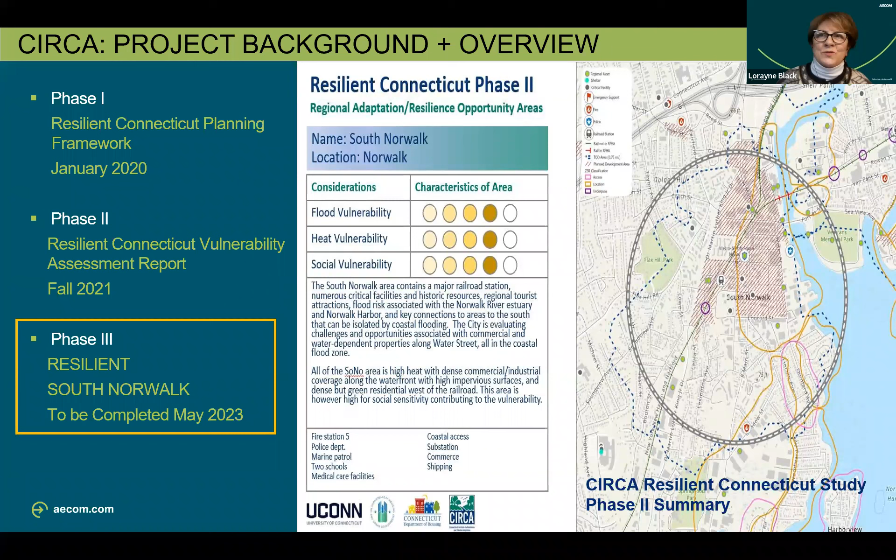And that's where we are right now. It's focused on 7 selected municipalities for pilot studies that will look at specific implementable concept plans. And South Norwalk is one of those selected communities. Next slide.

So phase 3, which, as I said, we're in the middle of, we're going to focus on heat, flood, and social vulnerabilities. The study area has large sections of impervious pavement and reduced tree canopy. It's adjacent to the shorelines of Norwalk Harbor and Long Island Sound, with the effects of higher tides and other storm-related flooding. It's within an area that the city is focused on for affordable housing. And it's also in proximity to the train station and some of the city's transit-oriented development housing projects. Next slide.

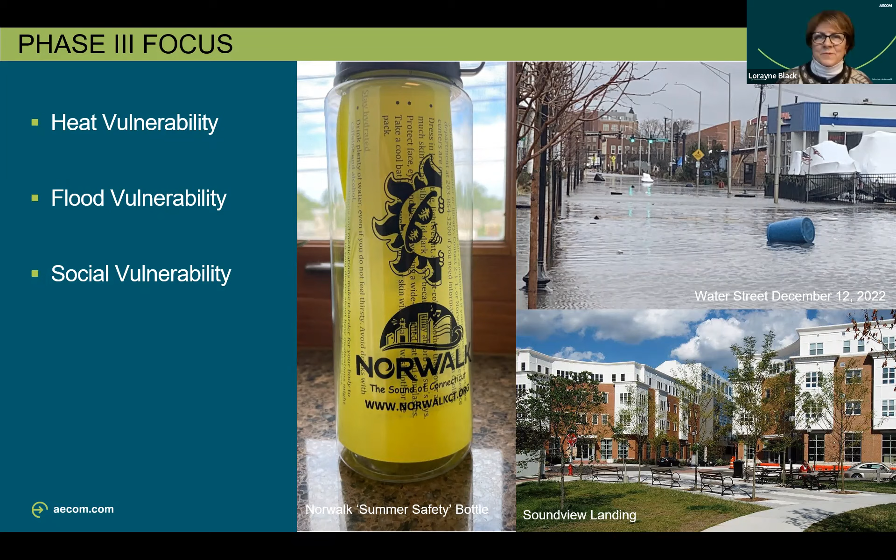So let's get into the study. Our study area is centered within diverse and vibrant neighborhoods of South Norwalk, bordered to the north by Day and Water streets, moving forward to the south to Meadow Street, which is to the west, and then further south down along Woodward Avenue.

to Longshore Drive. And the goals for the project were really threefold: to develop innovative ideas and strategies to reduce and lessen impacts of climate change, and to do that focused on heat and flood impacts within the study area in South Norwalk. And for the third, really, is to determine stakeholder and community member priorities, and that's why we're here tonight. In order to study the area in closer detail, just to understand this graphic that you're looking at, we've subdivided the project area, and you'll see this throughout the presentation.

We subdivided it into three study zones. We have the North Study Zone, which has distinct characteristics and climate impacts. The North Study Zone is comprised of the marina and industrial waterfront development along the harbor.

It also has multifamily housing and apartments within this area, such as the Soundview Landing and Harborside SoNo apartments. The Central Study Zone is a mix of single-family residential areas as well as industrial offices, particularly the residential areas between Meadow Street and Woodward, so very different land uses.

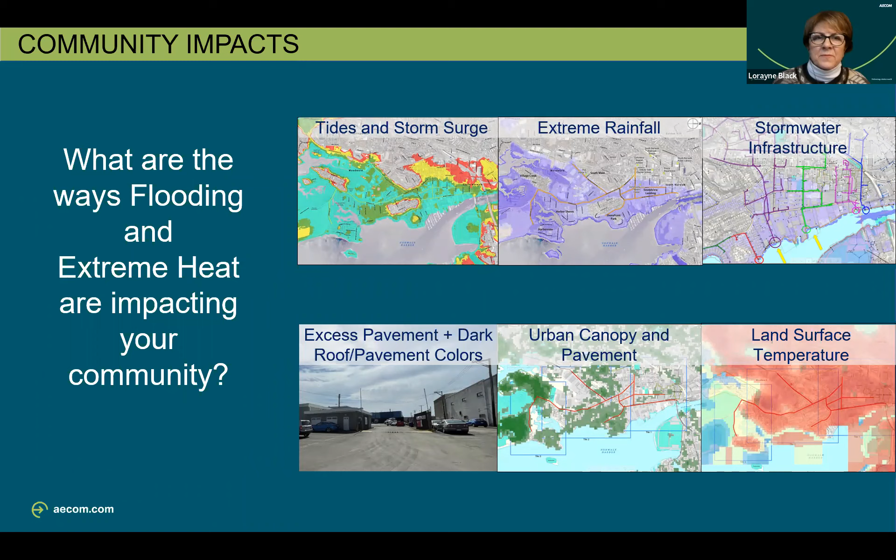So we're going to talk about heat. We've all felt the changes in the number of hotter and more humid days, especially last summer. When we look towards 2050, the average temperature is predicted to rise 5 degrees, and the number of days over 77 degrees is predicted to rise from about 81 now to 118.

We're going to prepare for hotter days, hotter nights, and more heat waves. So some questions to consider as we move through here: are you experiencing health impacts surrounding the change in temperature? Are there obstacles to getting to cooling centers? And have you gone to one in the past, or would you consider going to one in the future?

Do you think there are enough trees that create shade along sidewalks and around parking lots in your neighborhood? Are there large areas of pavement near you, and are they surrounded by buildings that might block some breezes from the waterfront? Are the roofs and pavement surfaces around you a darker color that might absorb heat?

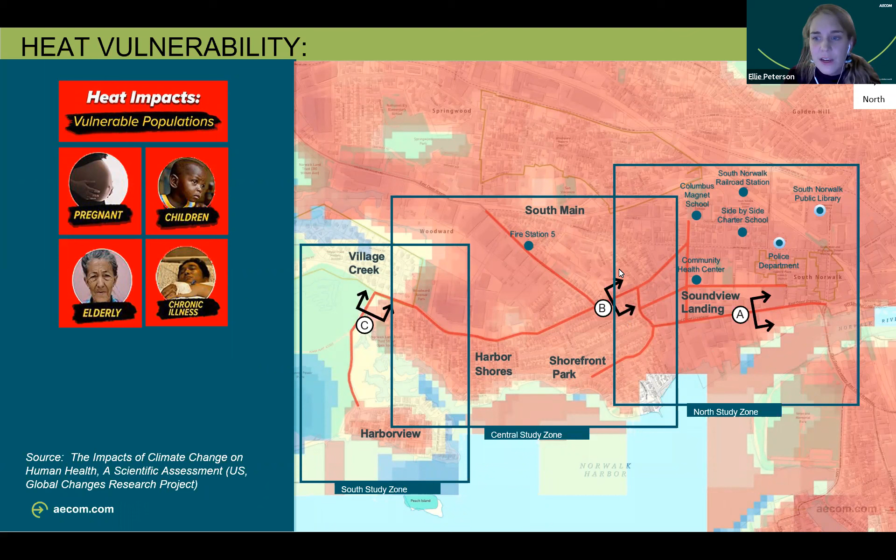So with that in mind, moving back over to the map, in this study we thought it would be helpful to zoom into areas within each of our study zones to determine how varying types of land use throughout the city can affect increased heat vulnerability, while also keeping these communities in the forefront as we discuss some of these key issues.

For the first example, we have a slice of Upper Water Street, which shows the conditions of a multifamily residential unit on one side, and the semi-industrial zone along the marina on the other side. In this location, temperatures were recorded at about 7 degrees over average, which is considered high.

There are a number of factors that can elevate heat in this scenario. For one, reduced tree canopy or other shade structures creates more opportunities for heat to reach the land surface. Large buildings can contribute because they often absorb heat and block wind from circulating. And as shown on the marina side, darker surfaces such as large areas of impervious paving absorb heat.

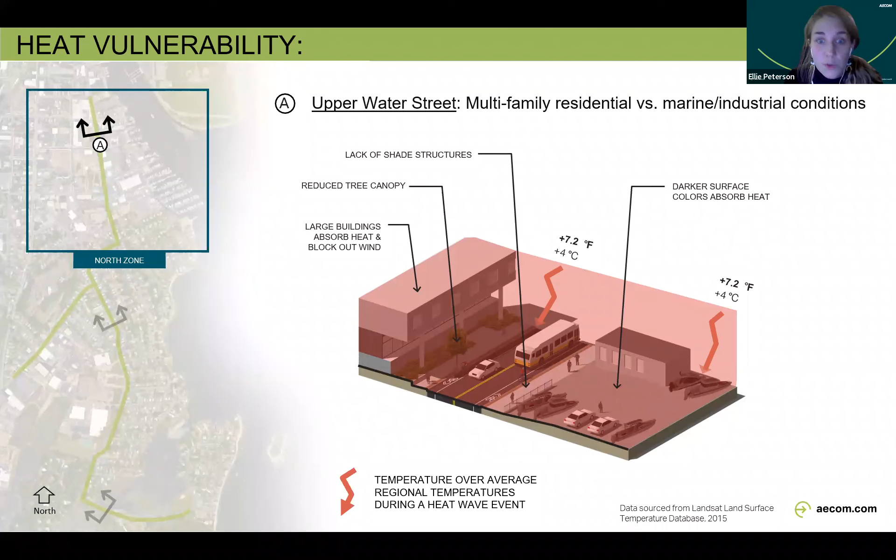Next, in the central zone, we chose the example of a residential neighborhood on Woodward Ave. This area also experienced temperatures of about 7 degrees over average, and although more areas were planted overall, there is still limited canopy along the road.

Another factor to consider in residential areas in general is how increased atmospheric pollution and waste heat via HVAC systems contributes to rising temperatures as well. Interestingly, ACs actually influence air temperature more significantly at night, so people without them are even less likely to experience the relief they would ordinarily get at night.

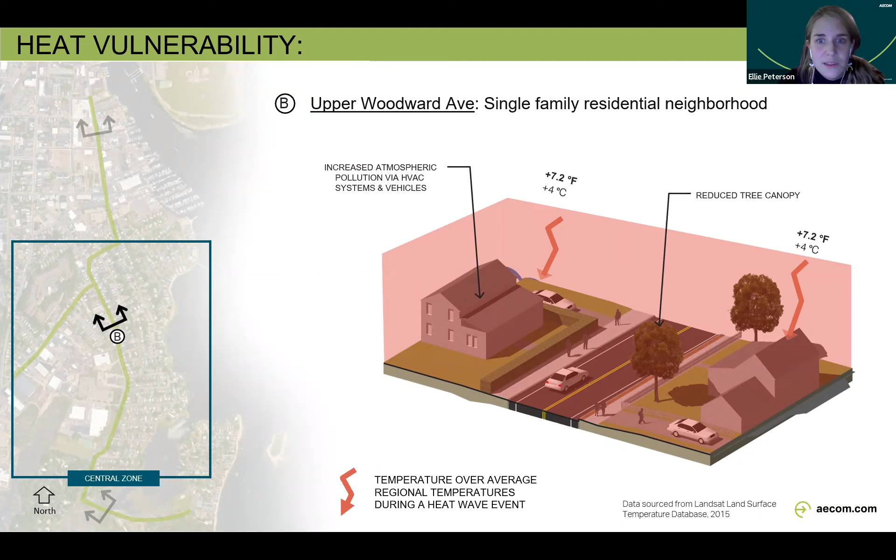And there's an awful irony in all of this, because as temperatures rise and hot days become more common, people will rely on home cooling systems even more frequently.

Then lastly, in the South study zone, we looked at a strip on Longshore Drive that passes through protected open space and coastal wetlands. This zone was heating at a much lesser rate despite its proximity to urban areas, due to it being a far more resilient area with increased green space and tree canopy. Also, wetlands reflect heat and therefore warm at a much slower rate.

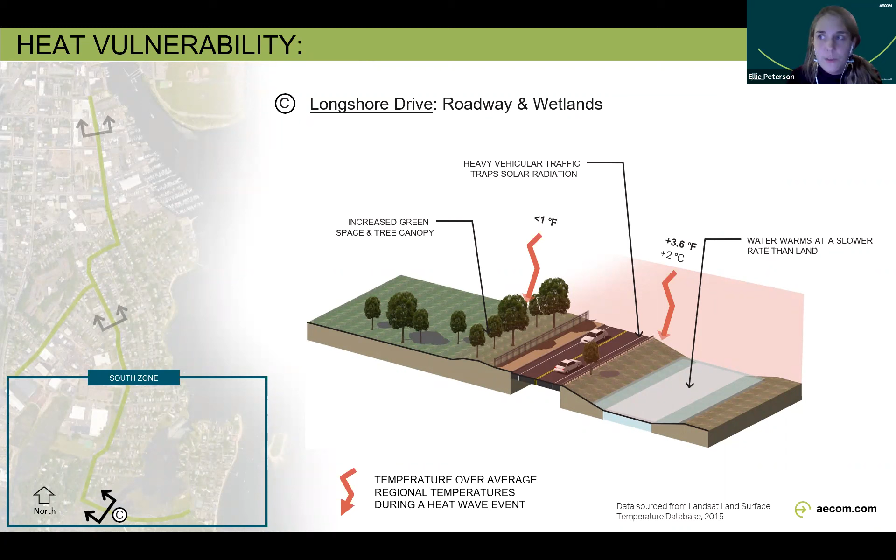So with some of these examples in mind, we thought we would move into our first discussion period to end and open up to questions.

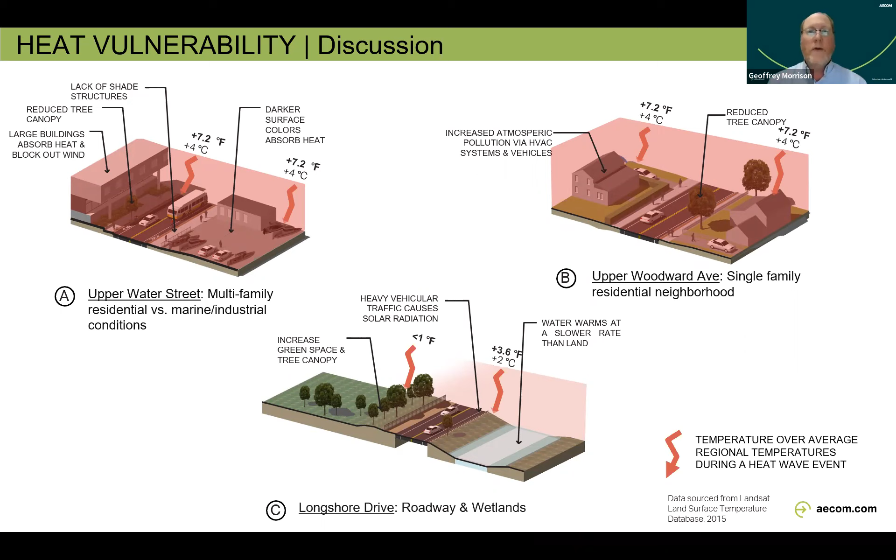Great, yeah, I think it's one of those things we can look at too. Part of it might be standards that the city has in terms of development standards. So when you come in to do a project and a proposal, clearly there's a need to get your site ready, but are there certain standards that can be put in place about replacing some of the tree canopy, or thinking about it a little more critically than what's happening right now?

So, good question, good comment. Well, and the city may already be doing this as far as assessing the trees themselves, what's the age of them. Once they get older, they are under stress and may suffer from some breakage, and then coming back through and planting new ones.

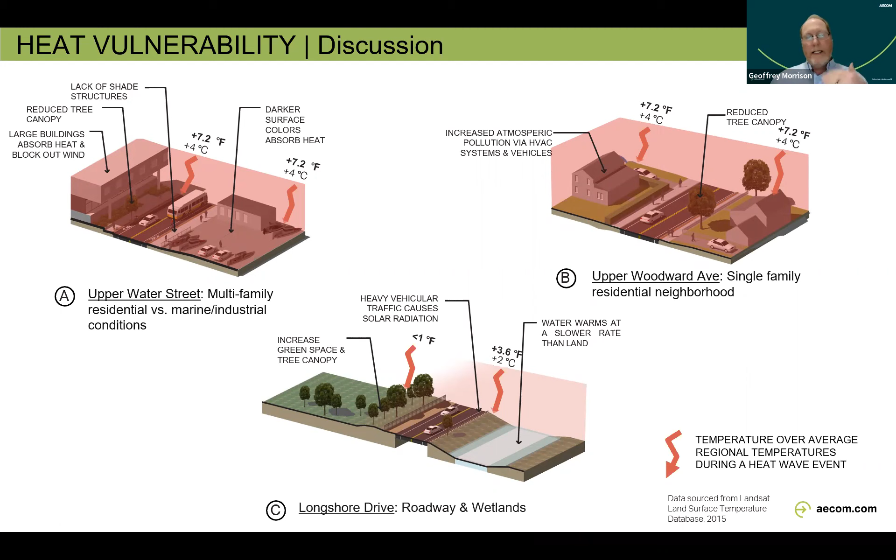Great, so Lorayne, I'd suggest let's move forward. So thank you for this. This is the first one of 3 more to go here. But again, the focus on this one was heat vulnerability. We really appreciate that. So if you want to keep the questions going, feel free at any point to add to the Q&A, and we'll come back to those as well.

But let's go on to the next part, onto flood risk. So now we're going to talk about the flood risk. Next slide, please. We looked at the existing and future conditions for flooding vulnerability within the project area.

As some of us have probably heard, sea level rise in Connecticut is predicted to rise 20 inches by mid-century, 2050, and to continue to increase even after that point. One thing to think about is that small changes in mean sea level have a big impact on the frequency of flooding. So currently, we think of flooding in minor, moderate, and major flooding thresholds, but they'll occur more often: minor flooding will become the mean higher high water, moderate flooding will occur more frequently, more annually, and major flooding will occur probably every 2 to 3 years in 2050. So definitely frequency is an issue.

And when we were looking at this, we divided it into generally 3 sources of flood conditions. Each of them contributes to the accumulation of surface water within the project area. So we can expect the source of flooding to be from storm surge, higher tides from the Norwalk Harbor and Long Island Sound, increase in precipitation amounts, and again, as I mentioned, frequency of storms, or possibly inadequate capacity flow in the drainage system. Probably more likely, it's really a combination of all these factors that contributes to current and future flooding. Next slide, please.

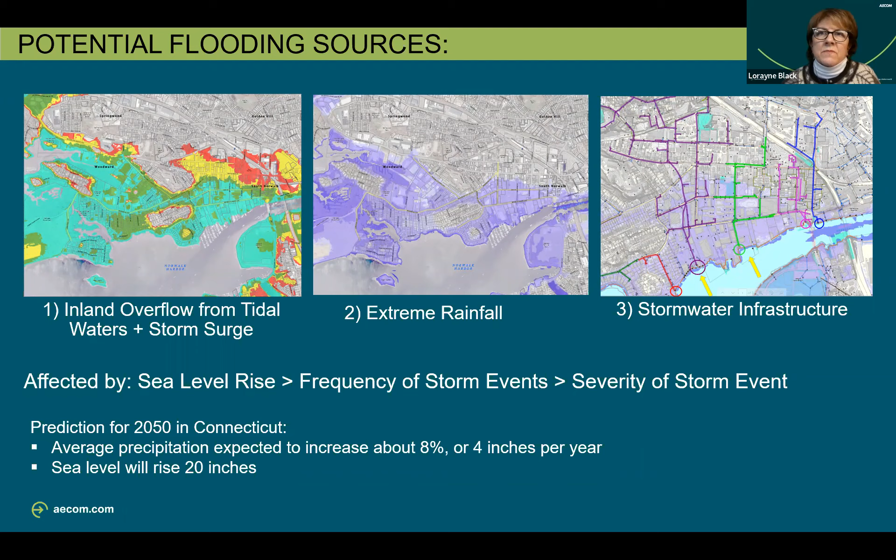So we've shown all of our flood limits based on 100-year flood maps as modeled by CIRCA. When you hear about the range of flood events referred to as like 25-year flood, 50, 100, 500, just as a moment of definition, it's really in terms of level of risk, not terms of years. So a 100-year flood describes the statistical likelihood of an area being flooded within any given year—it's like a 1% chance, or 1 out of 100 chance, of flood for any given year.

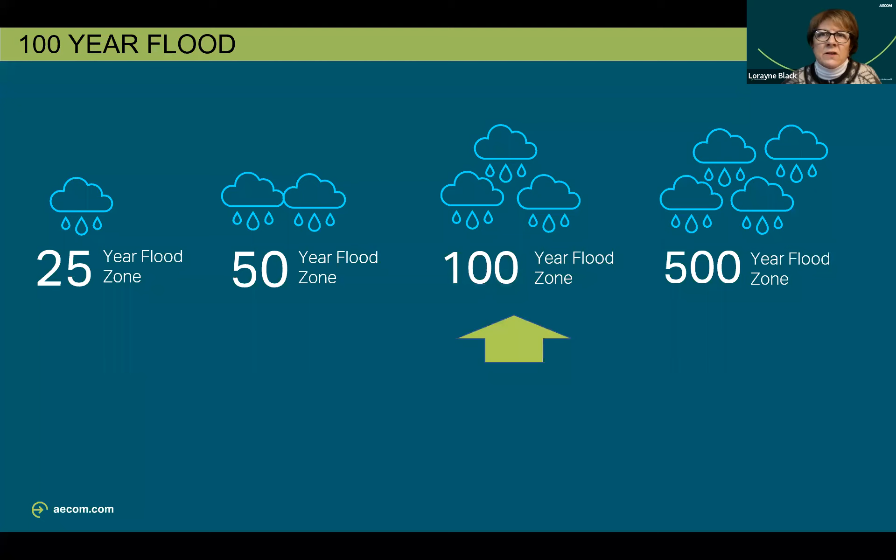And I'm going to pass this now on to Megan Gibbons, and she's going to walk us through discussing storm surge and also the stormwater infrastructure for our study area. So Megan. Thanks, Lorayne. You can flip to the next slide.

So storm surge is the abnormal rise in seawater level during a storm. What I have here is a very zoomed out picture of the location of South Norwalk within the Long Island Sound and further out the Atlantic Ocean.

Typical air patterns in a hurricane travel counterclockwise, and the hurricane is shown by that white circular twisty thing there. Storms traveling inland have wind patterns pushing counterclockwise, and the effects of each storm vary on strength and landfall. But if a storm is in the location shown, water is getting pushed from the Atlantic Ocean into the Long Island Sound, where it ends up getting trapped, and the water will pile up within that Long Island Sound by South Norwalk and move onto what is normally dry ground.

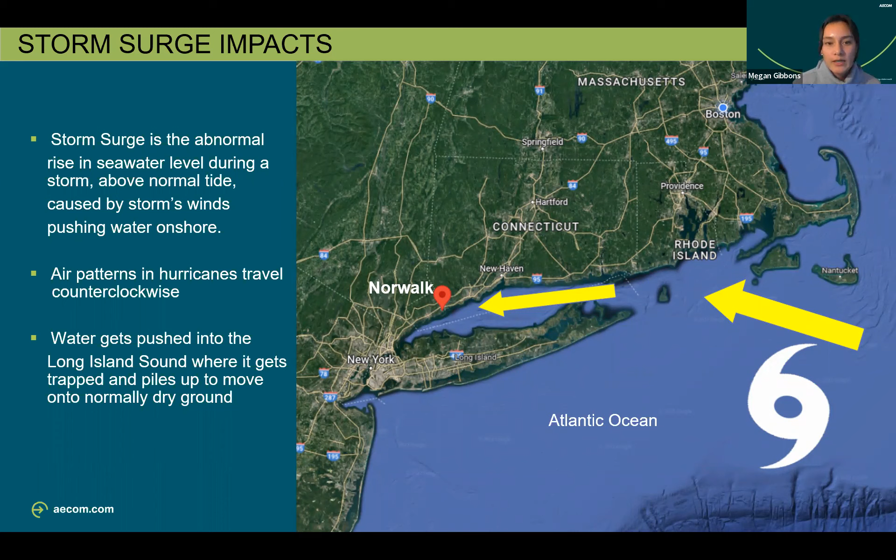So we're going to look at potential patterns of storms along the coastline of South Norwalk and how it affects the flooding there.

So here is a hurricane surge inundation map, and it shows the hurricane storm surge and each storm's potential flooding. The severity of potential flooding is dependent on each individual storm, so no two storms are the same, but you can see how the more severe storms flood further inland. For example, a Category 3 storm, shown by that yellow bar, the flooding area also includes the green and teal colors as well.

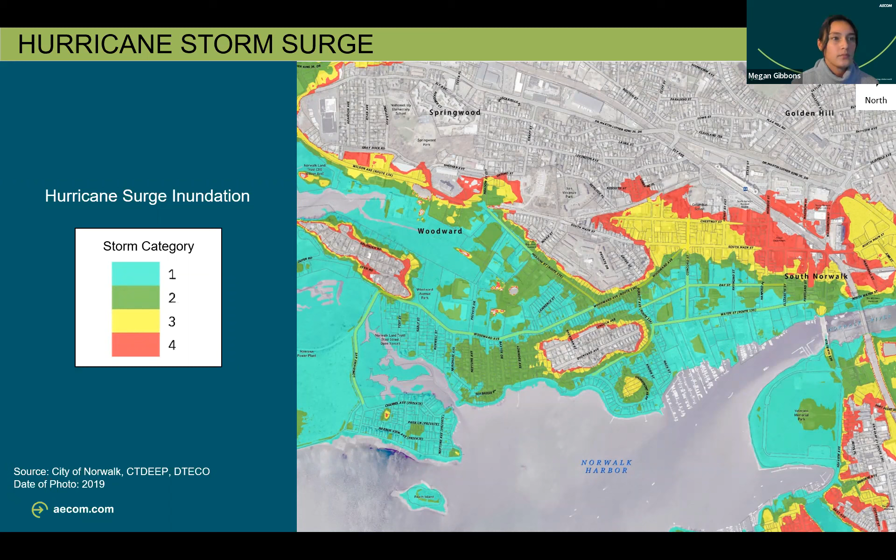This is a continuation of the same map, the Central Study Zone. Here, the neighborhoods of Shorefront Park, Harbor Shores, and Harborview are potentially affected from storm surge events. The surge is also able to extend from the Long Island Sound up through Village Creek and flood from that direction as well.

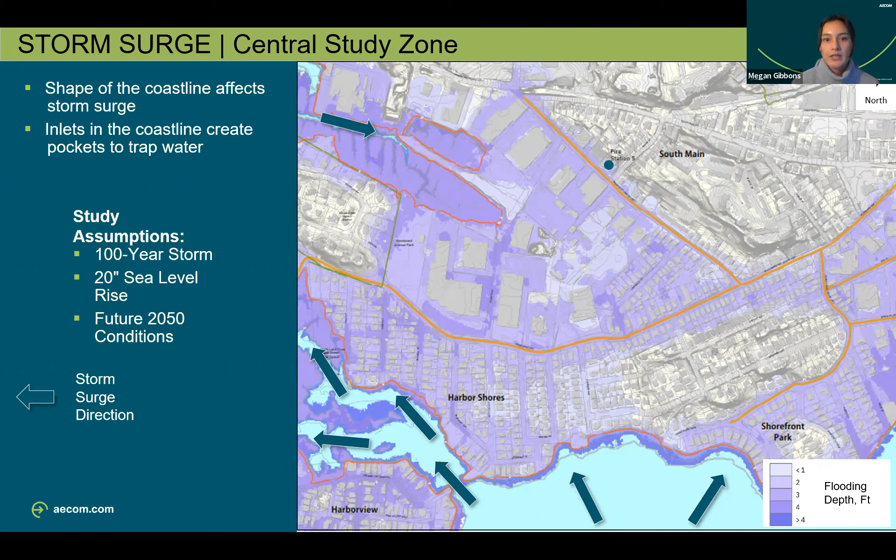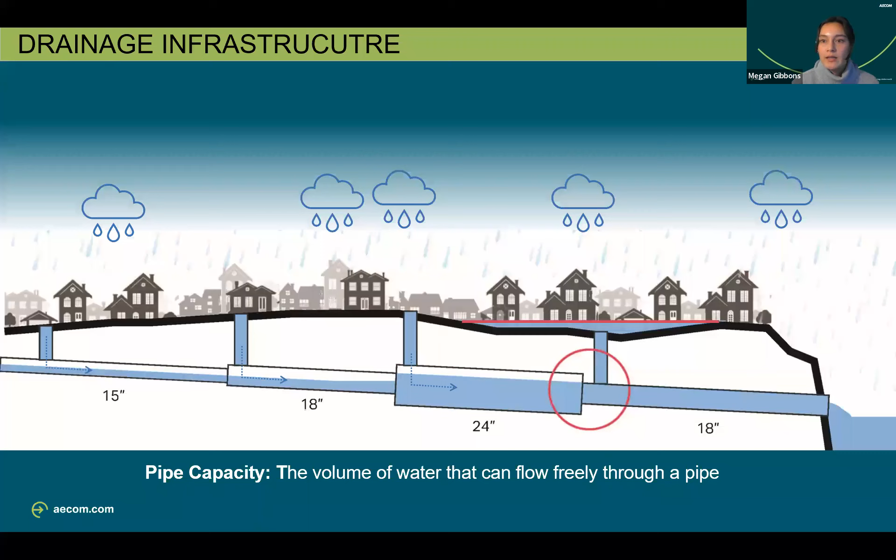We kind of want to think about it the same way as you would think about traffic. Imagine if you're on a 3-lane highway and you now have to merge onto a single ramp. Because the traffic is now merging into a smaller lane, it gets backed up, similarly to how the water would get backed up. It causes the water to get pushed further back into the drainage system, or in the highway analogy, and it will pool up and flood in your neighborhood because water is not able to move freely through the pipes. It's problems like this that we're going to be looking for in the existing drainage system throughout South Norwalk, and we will talk more on that and solutions for it in future meetings.

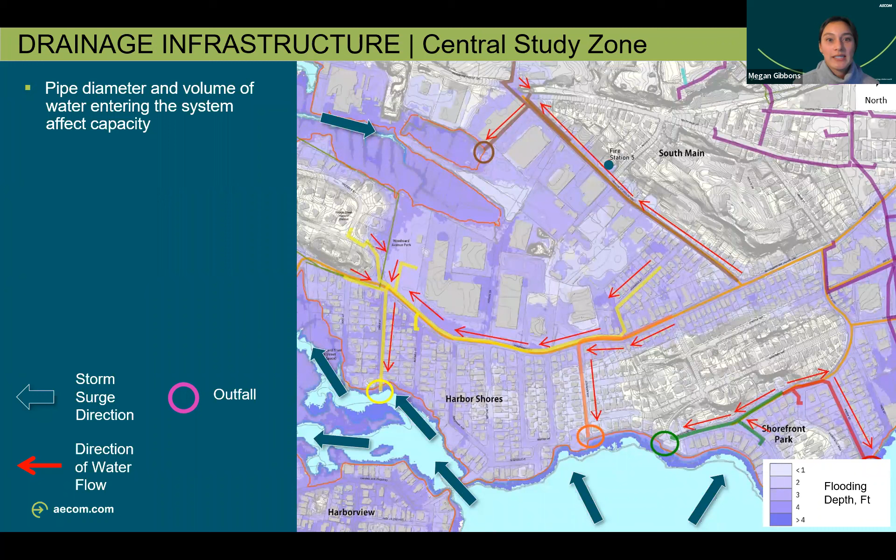We can move on to the next slide. So this is the central study zone. You can see a little bit of the purple network, and you can kind of see how our maps are flowing together here. This is just a map showing the combination of the drainage networks and the storm surge.

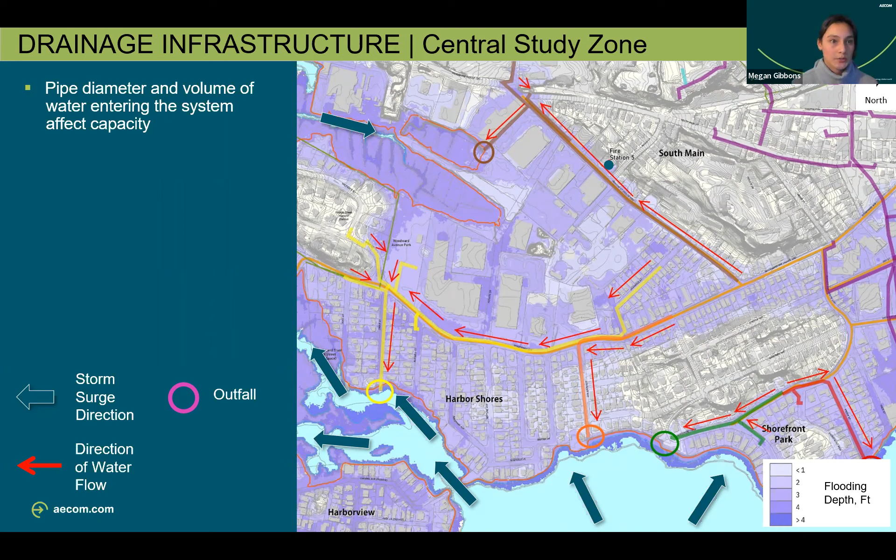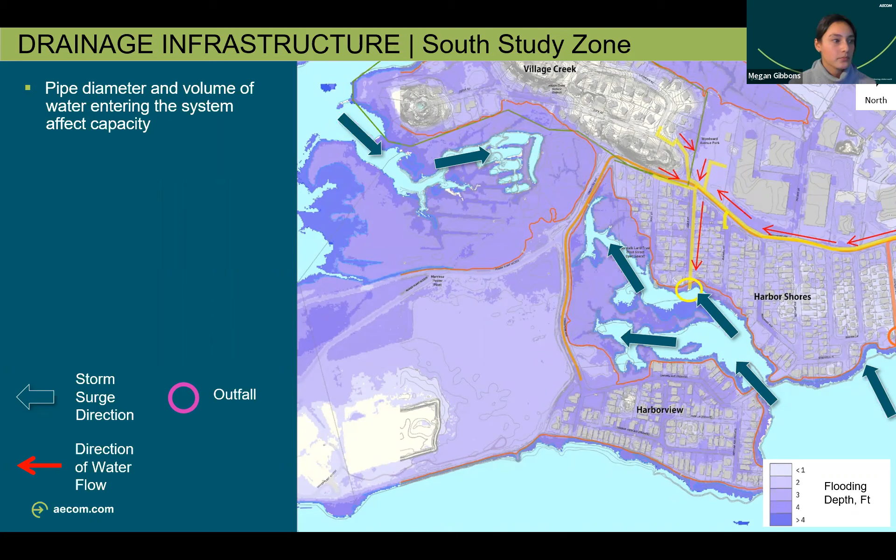And this map is the South Study Zone, same thing that we have been viewing. We're looking at the storm surge in combination with potential drainage infrastructure issues. So now I'll turn it back over to Lorayne.

Thanks, Megan, that was great. So now we've talked about storm surge and we've looked at drainage infrastructure, and we're going to move on to the 100-year flood, flooding from rainfall and storm events.

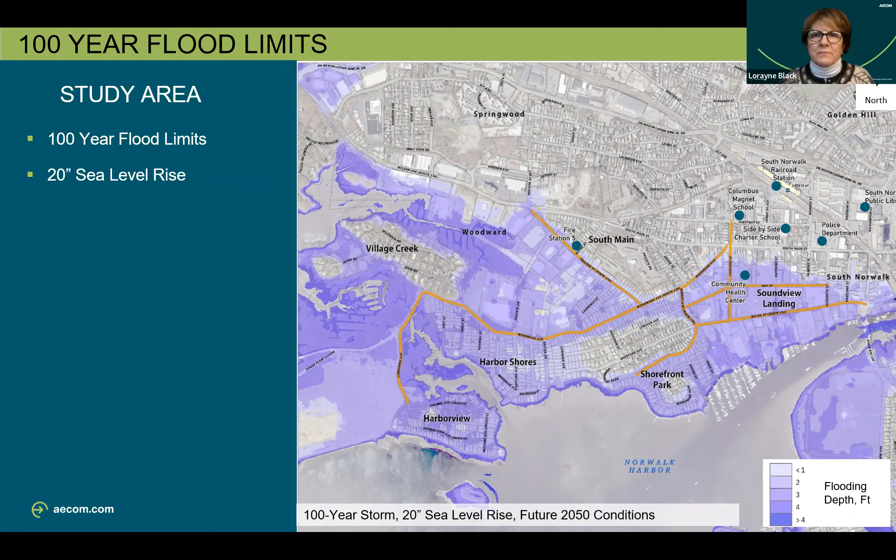Next slide, please. As we started looking at the existing and the future conditions that would potentially impact the zones, we've decided to select a series of representative locations within each of our subzones, so we'd really take a closer look and compare current flood limits with the future. The locations represent the different land use conditions to assess various scenarios, so that when we look at the next stage and look at mitigation and some concepts, we have good examples of varied land uses.

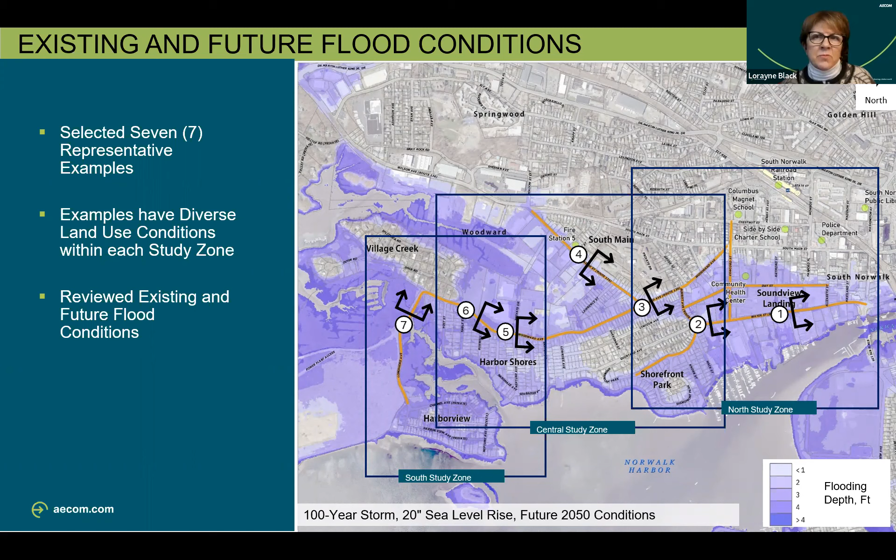These locations are identified, as you can see. There are 7 of them, and they're all numbered. We've looked at that in more detail. Next slide, please.

So looking at the North Zone, next slide. As we did for the heat section, we subdivided the project into 3 zones, starting with the North Study Zone at the north end with Day Street and Water Street. We have 2 locations that we've selected for the North area. These 2 locations are representative of the neighborhood because they include the waterfront along the marina and the industrial land uses. This area is also currently being reviewed through the recently completed Norwalk Industrial Waterfront Land Use Plan.

Across the street, number 1 is the Soundview Landing Development. This site has a number of site design elements, it's so new that it really addresses resiliency, so I thought that would be a good example of a location to look into. Number 2 is further south on Water Street. On the west side, it's an office building with a parking lot, and on the other side of the street is a city-owned property building, the 2nd taxing district. I think it might be a DPW building.

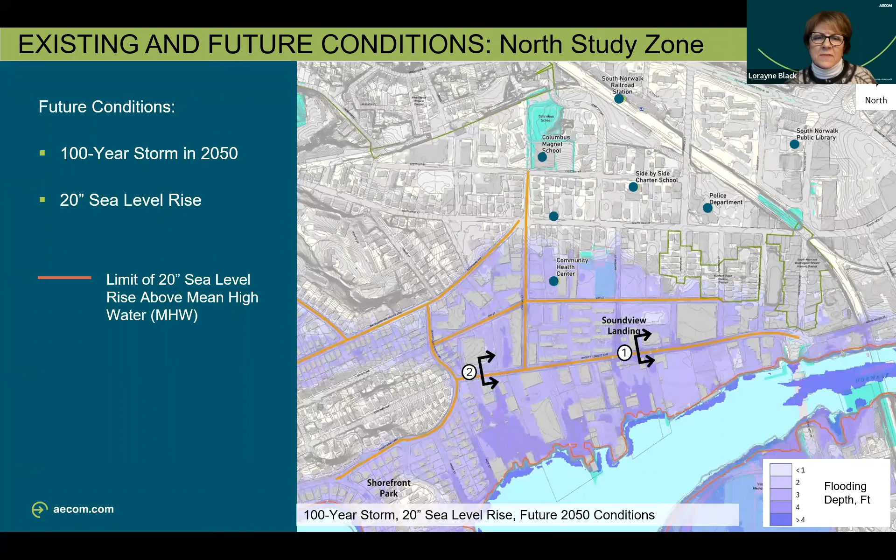So we're going to move on. Ellie Peterson is going to talk in a little more detail about these next illustrative graphics that show a no flood condition and the change with a 100-year flood in 2050 with sea level rise.

Thanks, Lorayne. A little disclaimer, I'm hoping to move through these graphics fairly quickly so we can have enough time to discuss them with everyone. We have a lot of visuals to show, and they're really here to help us brainstorm some ideas and observations and get the conversation started.

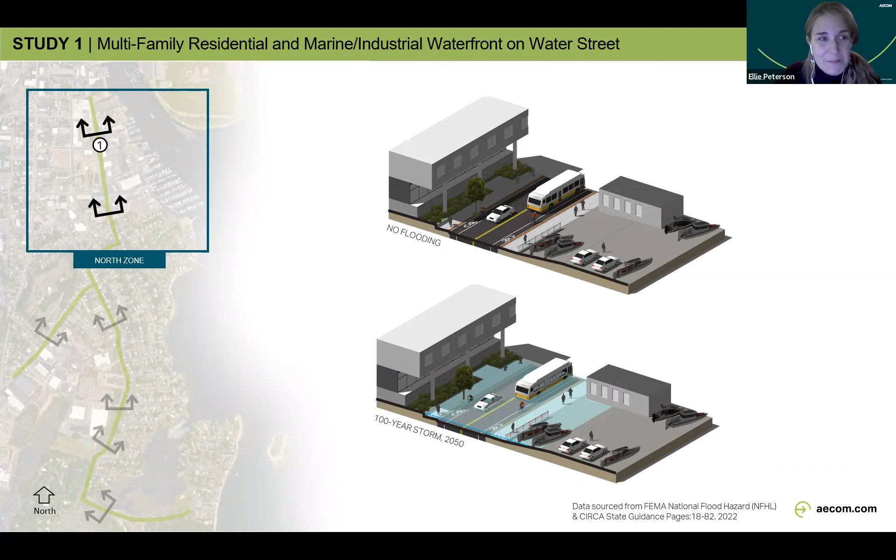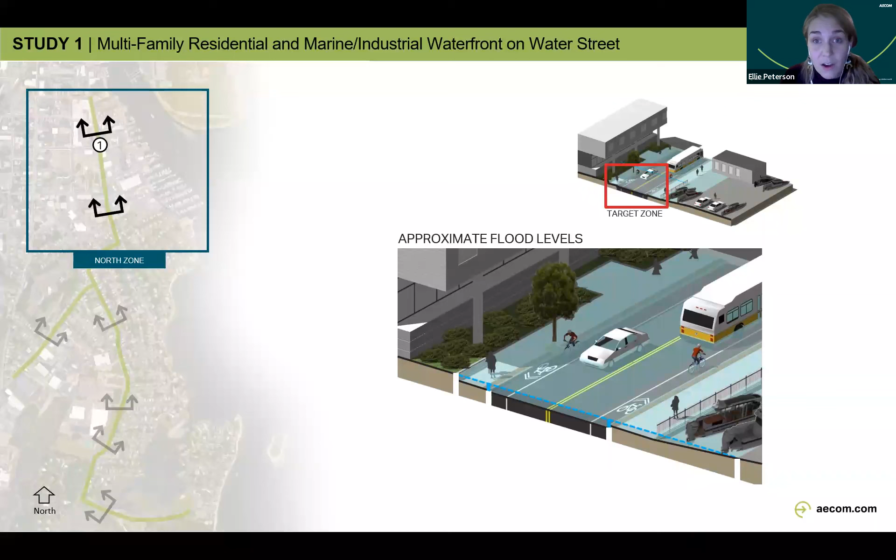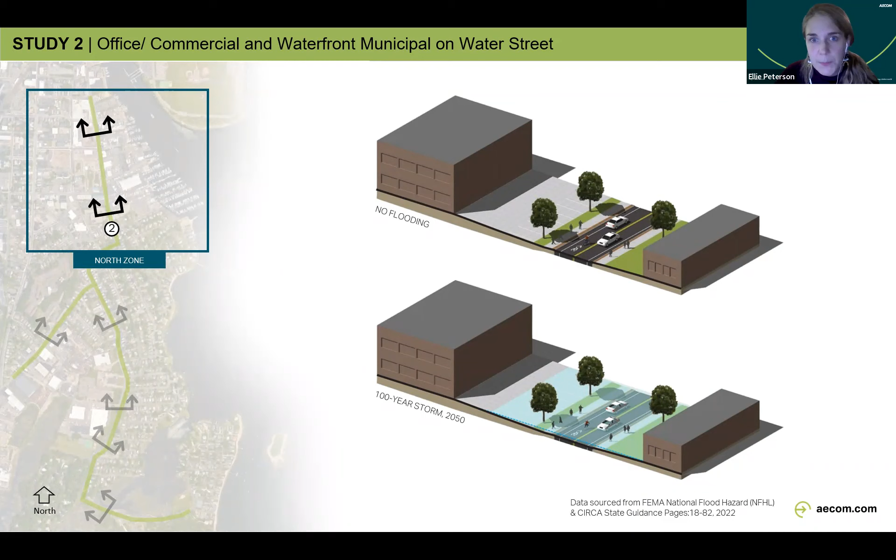And so again, flooding continues to impact Water Street most heavily, and circulation challenges could continue to be a consideration here. Clearly, local businesses would be affected as well, so we might consider how limited parking or access might affect those populations.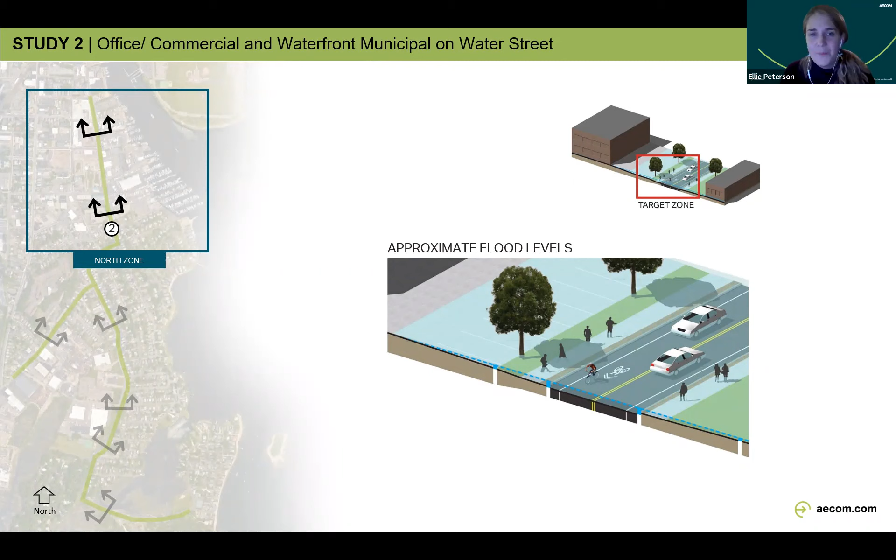Additionally, we may have more flexibility with land use shifts in this particular location due to it being public property. So we may consider more localized flooding mitigation, such as pervious paving or expansion of planted sections to include bioretention beds, for example. Now you can move on to the next slide, where we'll open it up to our second slot for discussion on flooding.

Well, thank you for that, Ellie. Really appreciate it. So here, as Ellie mentioned, we wanted to use these two case study locations to talk about some of the dynamics of flooding when we look out to 2050 and some of the different elements of your street that are impacted.

It's interesting, we'd love to hear comments from folks about understanding the North Zone. What is it like to walk down these streets during a flood event? One of the original slides Lorayne shared showed what it looks like when it's flooding, impacting sidewalks, the roads, the cars, the marine industrial area on the waterfront, and what folks need to do during an event.

So we'd love to confirm what's happening and make sure we're getting these graphics right, and hear about local issues so that when we come back at our next meeting, we can talk about some of the changes in intervention. Let's open up the conversation again. Reminder to raise your hand, we'd love to get some of the conversation going live here as well. We can obviously post some of your comments here.

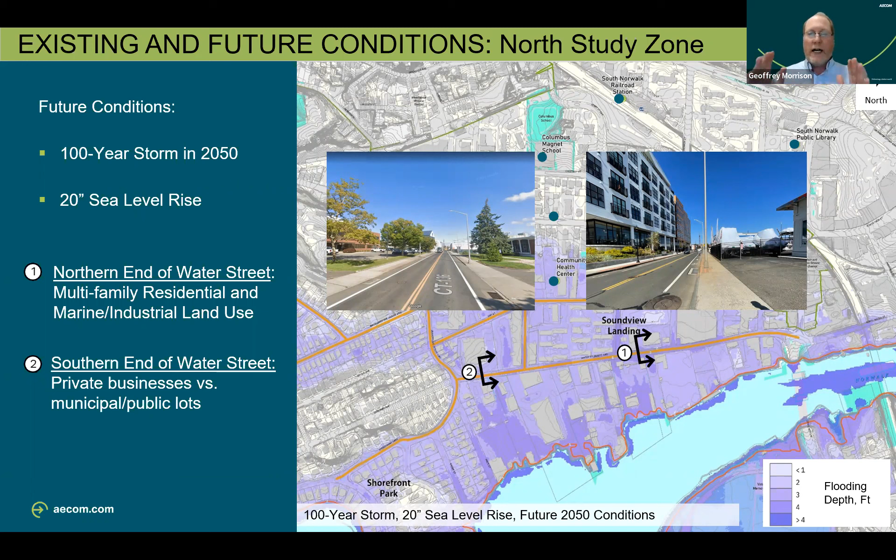So maybe, Lorayne, as you're going through those, we'll try to hit the ones about flooding in terms of the Q&A this time as well. We also have a resource map here to talk about neighborhood issues in addition to these two typical zones. We'd be happy to talk about anything in this northern district as well as those two case study locations. So with that, let's start on the audio.

So Michelle, who do we have that's raised their hand? You want to invite them to come off mute? Sure, we have Lori Jones.

There were other areas around Ryan Park that could have been used in addition to it, but not on Water Street. Also, I asked AECOM to take a look at a major project that seemed to have just been abandoned on South Water Street back around the 2000s. The DPW was supposed to consider raising South Water Street, but it's a rumor. But because I know, as in my background, there were some oil tanks in the marina area and they had leaked. So when they started doing some digging, they ran into oil in the ground.

Allegedly, that is why the whole project was abandoned, and they did minor drainage improvements. Also, some of us during the time of the Washington Village debates stated, why can't we raise parts of South Water Street and include flood check valves in the storm drain so that water would not back up into the pipe system. I really like a lot of your graphics, it really helps explain some things related to that. And lastly, I just wanted to say that increasing true green infrastructure is a way of absorbing the floodwaters and releasing them slowly, because green infrastructure helps cool down the waters, clean up the waters, slow them down, and release them slowly back into the sound. So thank you so much.

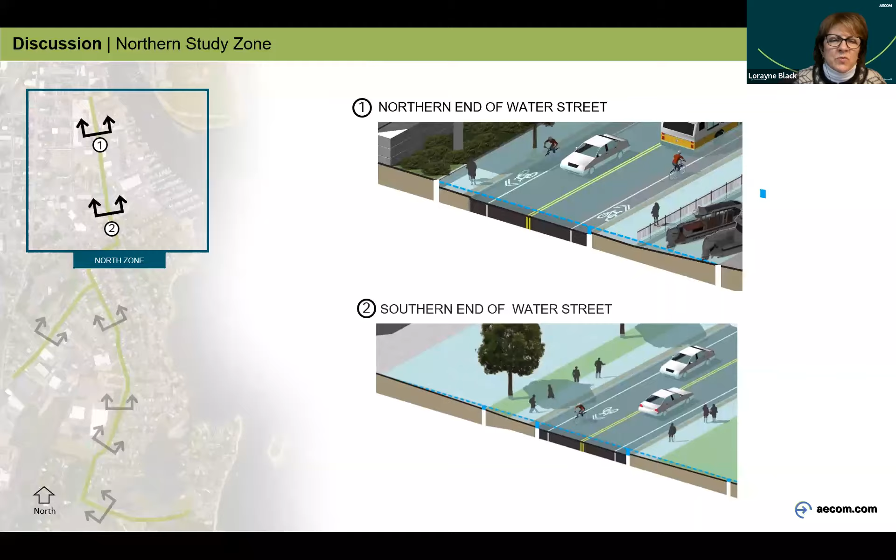So Lorayne, any on this subject that you'd like to point out? A couple questions? Yeah, there's one question here or statement from Joe Schnerlin - on some of our floods, a concern is not only how people get in and out of an area, but also what washes ashore, such as vessels and docks. Depending on the depth of the water and wind, these can slam into buildings, fences, as well as other vessels. So I think that's a good point that hasn't been brought up. Yes.

Were there others, Lorayne, or are those the big ones? We've got one from John Pinto: future planning in the city has not adequately considered or demonstrated an understanding of the state's Coastal Management Act and the Municipal Coastal Program.

Great, thank you for that comment. And then we have an anonymous attendee asking, will the steering committee suggest posting signs in the flood zone?

It's typical that these types of studies, while they are long term, we're doing them for a reason to be able to make actions out of them. So the whole idea is this is one step, but we want this to be a very actionable plan that might need some time to raise money and get things into place, but also having champions and sponsors who will move these different projects forward. So we always look for those interim steps that while you're waiting for time or for money to show up, what are the things you can do for shorter dollars and highly implementable things to help out in the short term? So love those comments as well.

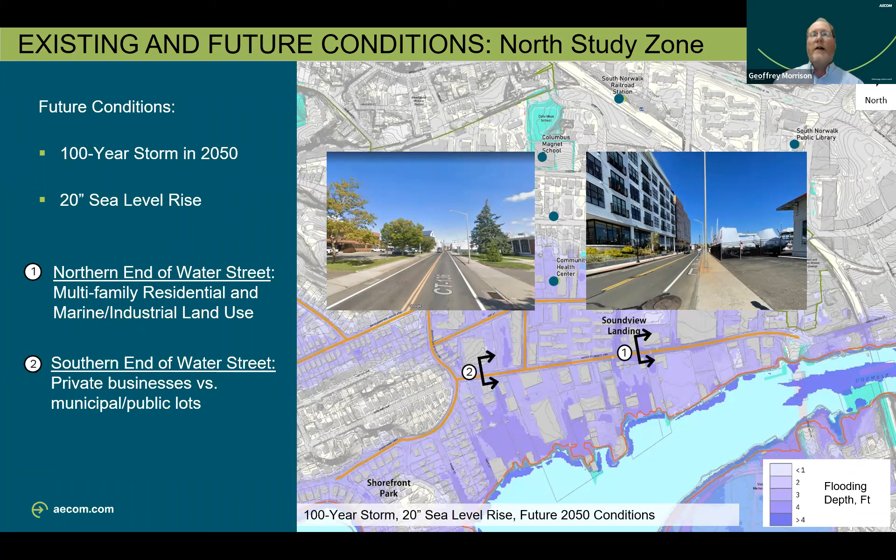All right, so any other major ones before we move on? Because it'd be great to go down, same exact topic, same exact issues, but we'd love to go to the central district because we realize that they're very different issues as we go north-south. Okay, no, I think yeah, we can move to central.

Okay, so again, we're making our way from north to the central area, and in this study area we looked at 3 representative locations in the neighborhoods. Again, because we're looking for areas that have land use variation within the central study zone. So the location on number 3 includes a residential neighborhood with single family homes.

It's close to the intersection of Woodward Ave and Meadow Street. And it's for those who live there, it's close. I believe it's the CNS grocery is right there.

Location number 4 on Meadow Street is right adjacent to fire station number 5 and Novak Street. And we chose that because it seemed representational. It's got 2 commercial industrial businesses across from each other. They have large areas of pavement, both for parking as well as outdoor storage area.

And the location number 5 on Woodward Avenue is right near Neptune Avenue in the Harbor Shores neighborhood. This includes single family residential homes on the east side of the roadway. Across the street are larger warehouse commercial buildings with lawns along the roadway, and then large pavement areas adjacent to the Village Creek wetlands in the back.

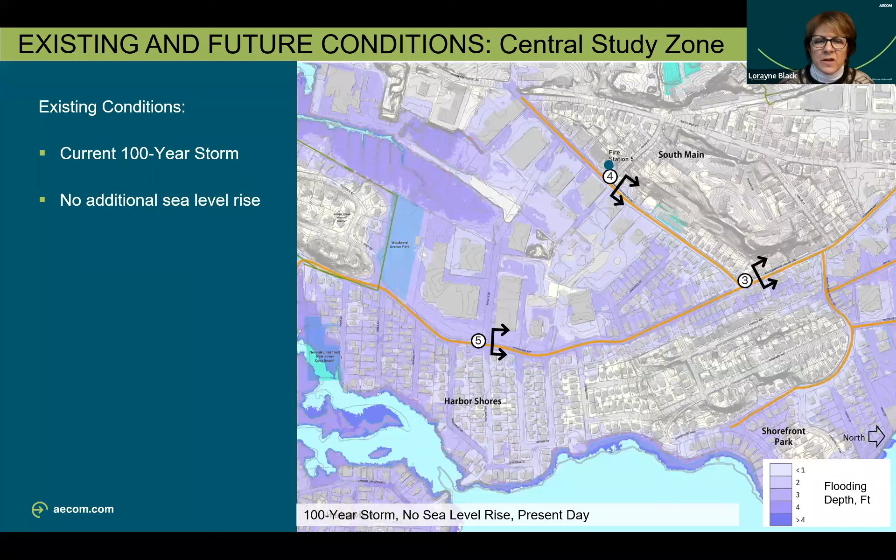Next slide. So that was existing conditions, and we can see the difference when we flip to the future 2050 conditions, the extension of the flood zone. Next slide, please. These next 3 slides will show some photographs of the area, just so people can be reminded what areas we're looking at and how different the land uses are for each of these study zones.

So we'll go on as we did before. Ellie will continue to present and take a closer look at the no flooding and 100-year storm contrast. Okay, thanks, Lane. You're welcome.

So for number 3, we are in the central zone. And as Lorayne had described—sorry, I thought I was in a different presentation—right, as Lorayne had described, this is showing the conditions of a single family residential neighborhood on Woodward Ave.

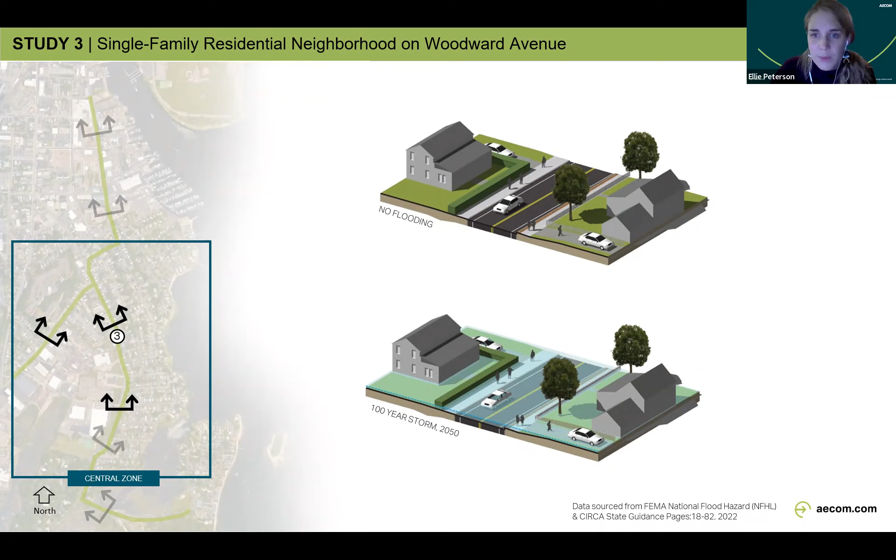It was the same section that we had been looking at during the heat study earlier on. Again, the same format as before: we have no flooding on the top image, and then the bottom image shows the scenario of the 100-year storm in 2050. Okay, thank you. Next slide, please.

This section shows a fairly typical scenario of flooding for this area. I'm going to be really curious to hear some comments if anyone who lives here is present tonight, where it's predicted that the majority of the homes will be significantly impacted during a future flood. As this is a residential area, any mitigation effort locally would have to be done in the right of way. However, this could lead to an interesting conversation about how we might be able to proactively address the source of where the water is coming from outside of these neighborhoods.

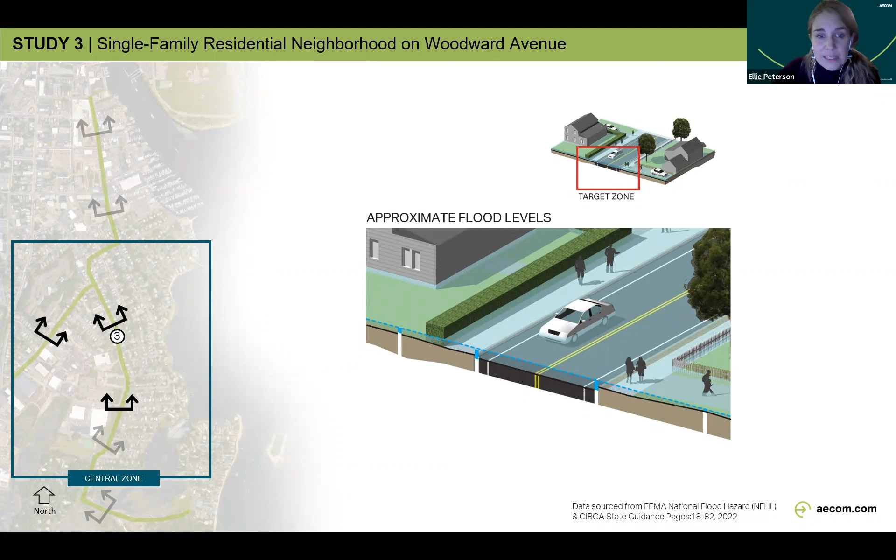And so then for study 4, we're looking up Meadow Street at the recycling center, near the fire station at this location. The first image shows a scenario of no flooding, and then the second image shows a scenario of flooding in the future.

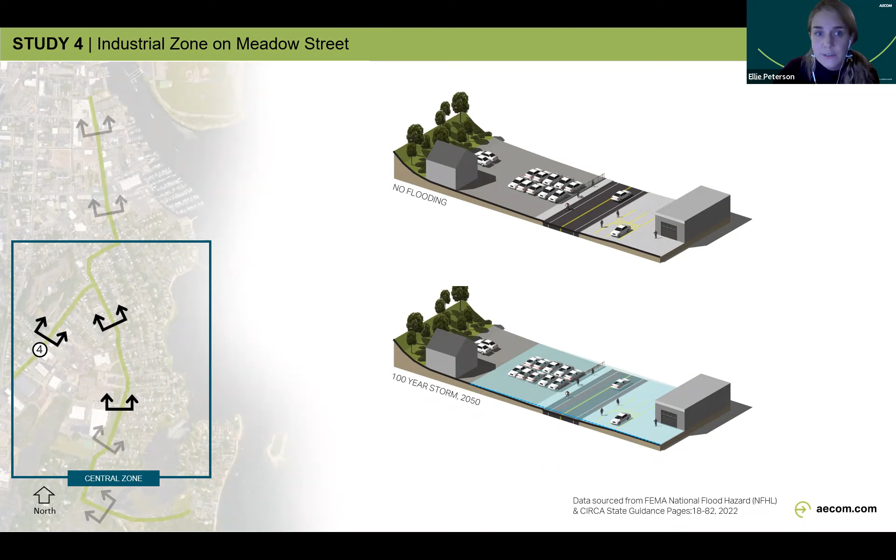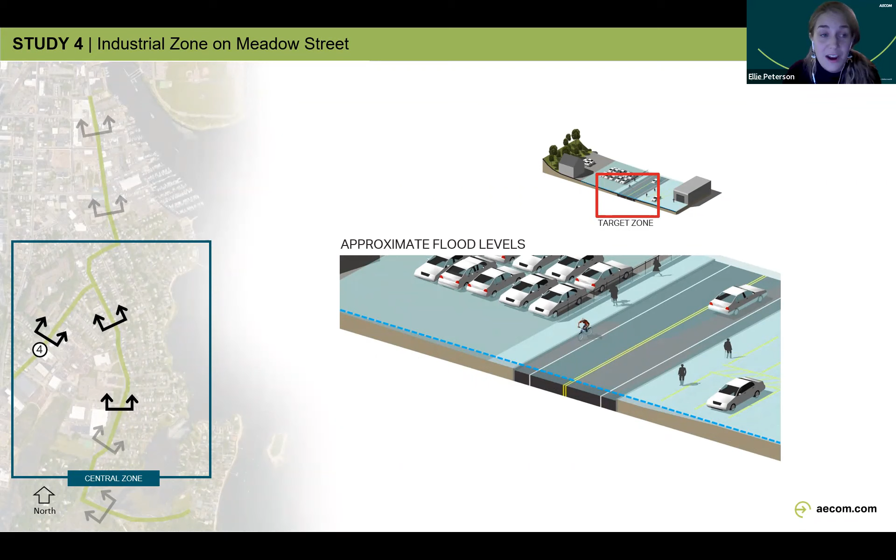Here we can see a higher impact of flooding due to the grades. As you can imagine, a lot of water comes down the slope and collects at this lower elevation. In addition, the concentration of paving here allows for very little relief during a flooding event.

And then for study 5, this was the last area that we considered in the central zone. As Lauren had mentioned earlier, it's placed approximately where the WB Mason factory is, just off of Woodward Ave. On the other side of the street, we show a small piece of the Harbor Shores residential neighborhood.

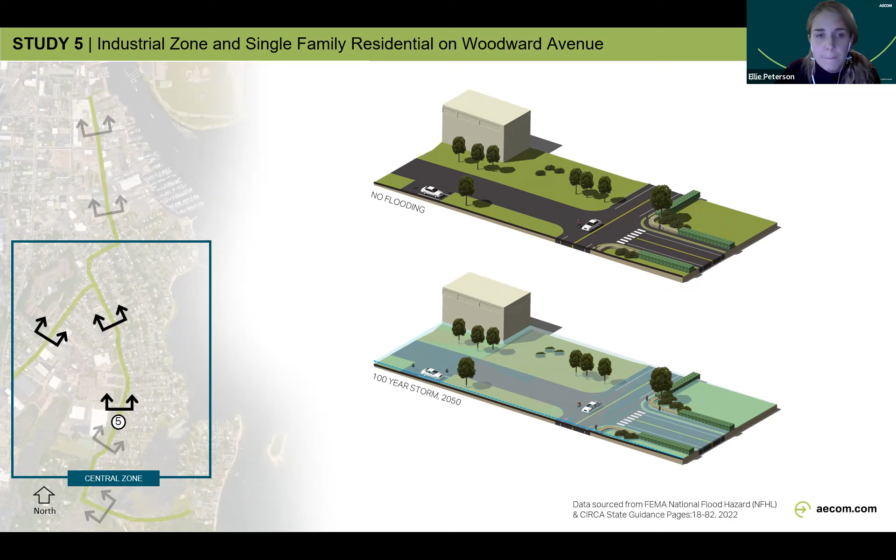Here the deepest water levels appear to be up on the west side, which leads us to believe that a significant amount of water is flooding up from the estuary, passing through Village Creek, as well as from the Norwalk Harbor and Long Island Sound to the east—essentially from all different directions.

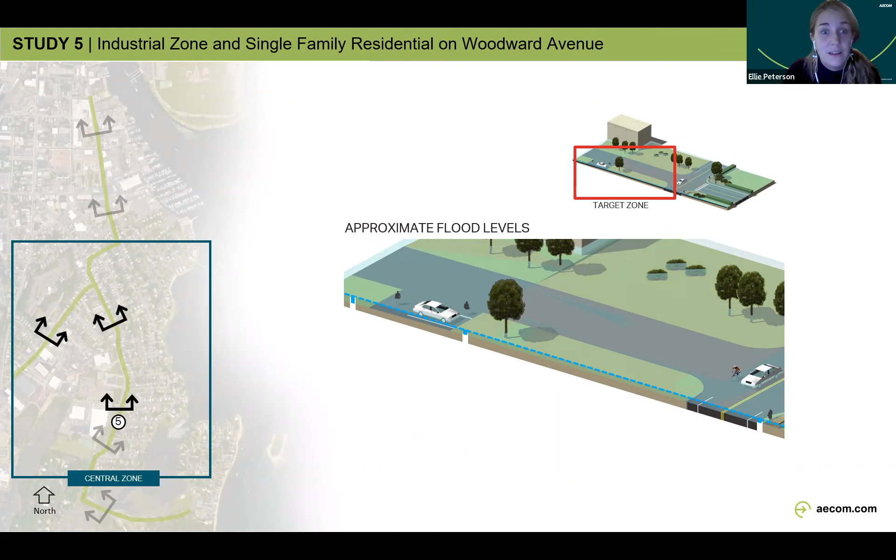Although part of this area is vegetated, it's mostly made up of lawn, which is surprisingly poor at absorbing water. So to give you some frame of reference, lawns, because of the grassroot structure and soil compaction, can only absorb about 2 inches of water per hour, compared to more diverse environments that can handle up to 7 times as much.

So with that, we can go into the next slide and continue the conversation. Great, thanks again to Ellie. That's why we wanted to make a distinction between these 3 different zones, knowing that the central zone has very different characteristics from the last couple of sections we've shown here.

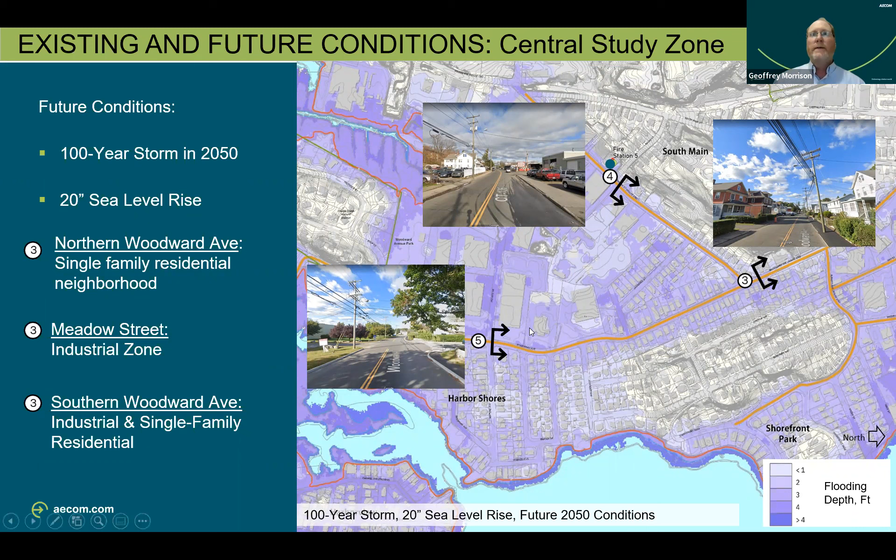Okay, well let's go back to South Zone. Lorayne, back to you. Yes. Okay, on to the South Zone. So the final two representative locations for the southern end, at Woodward Ave and Longshore Ave, represent residential and wetland open space land use variation typical of the South Study Zone. Number 6 includes a residential neighborhood with single-family homes at Harbor Shores, close to the intersection of Woodward Ave and Burl Street.

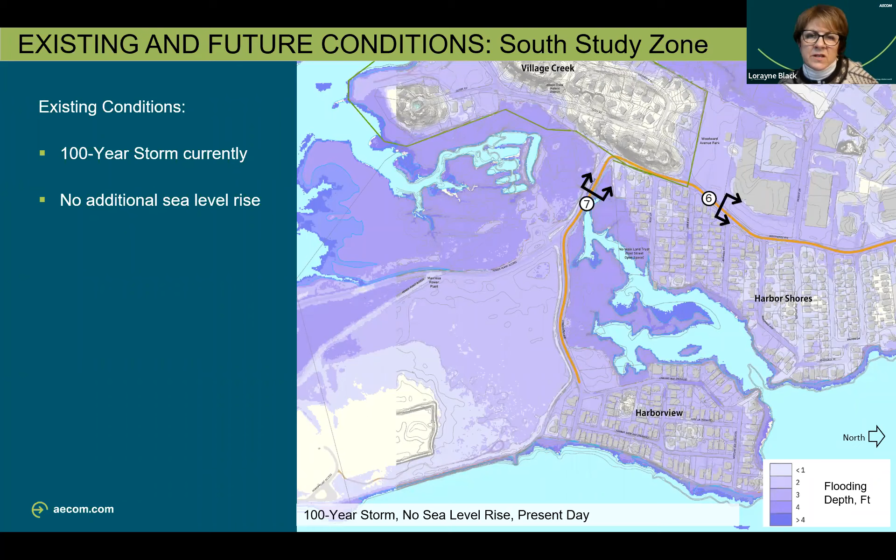And this is present day. If you move to the next, we'll see this is the future with a 20-inch sea level rise change. And here are some photographs of those particular locations.

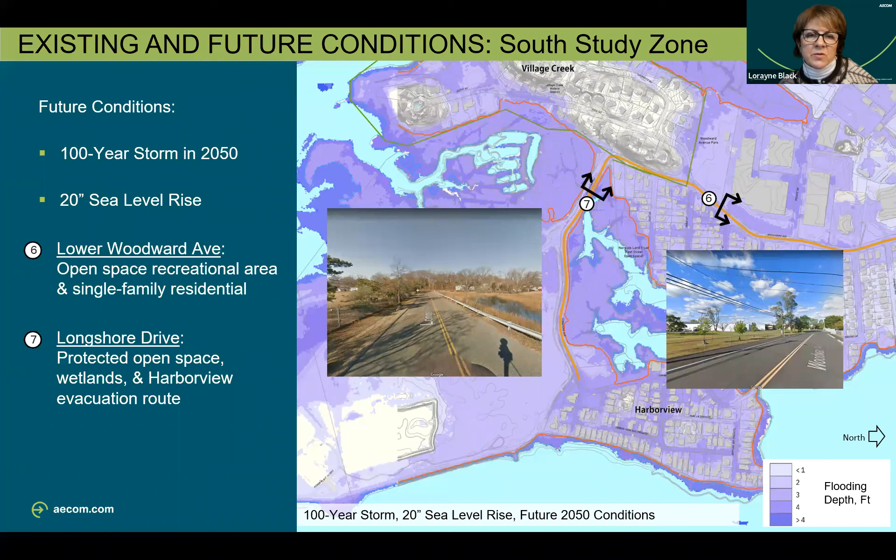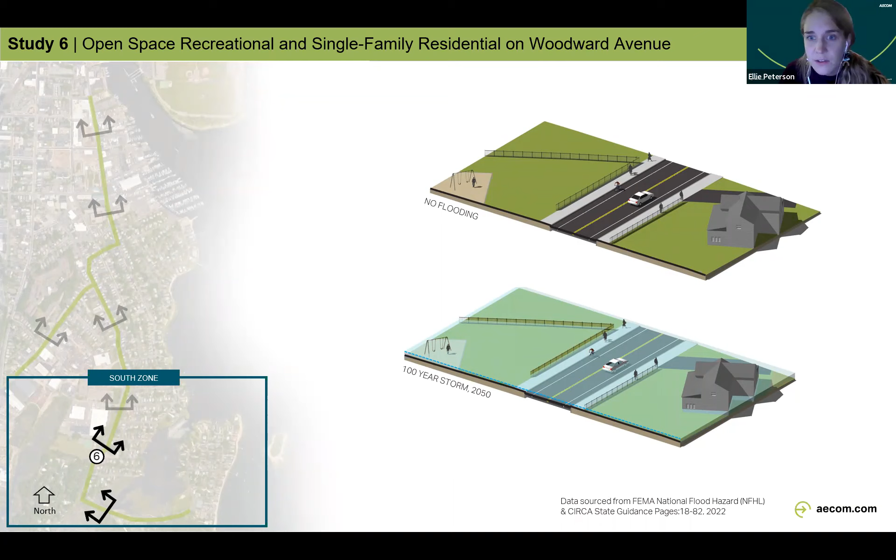Perfect. So for study 6, we show the conditions of parkland, the Woodward Avenue Park, and then the residential context that it meets on the other side of the road. Go to the next slide.

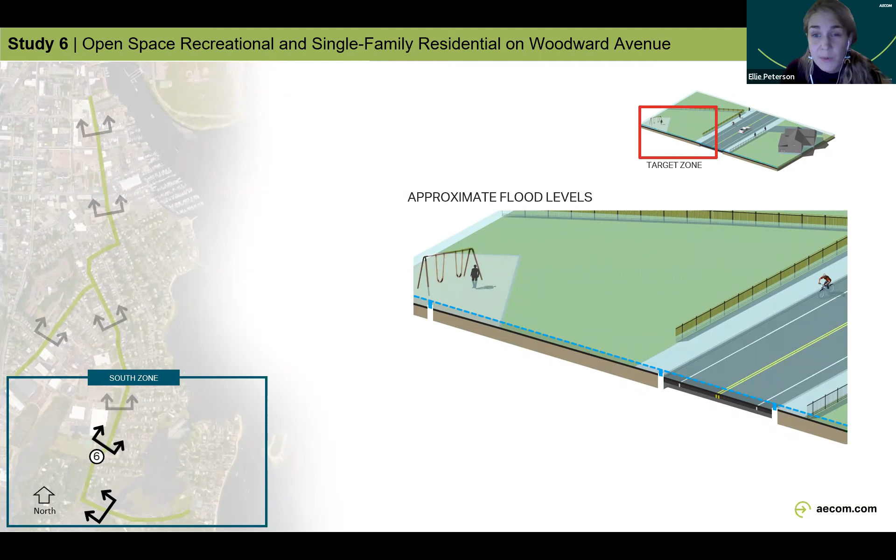Again, here, the deepest water levels appear to be up on the west side, which helps confirm that water is inundating from all directions on the coastline. And then over time, as the park continues to flood more regularly, this could lead to damage of the soils and unusable portions of land. So it's smart for us to be conscious and consider how we might be able to reconsider this area so that it could be more tolerant of flooding in the future.

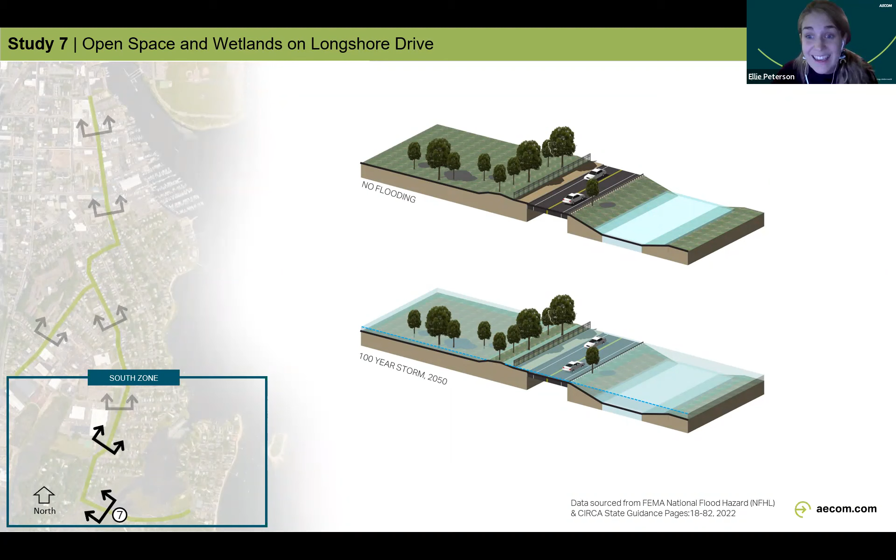Move on to the next slide. So then the 7th study zone we looked at was Longshore Drive, which runs from Harborview towards the center of South Norwalk. As Lorayne mentioned, it cuts through open space and wetlands, which is anticipated to be extremely flooded in a 100-year storm event. Next slide, please.

This section really shows how resilient this corridor is compared to some other areas around the city. However, according to our storm surge analysis, water is expected to be flooding from both sides of this road and doesn't really appear to have anywhere to go. So I appreciated Diane's comment during the last Q&A where she was raising if there are any opportunities to raise the road at any point.

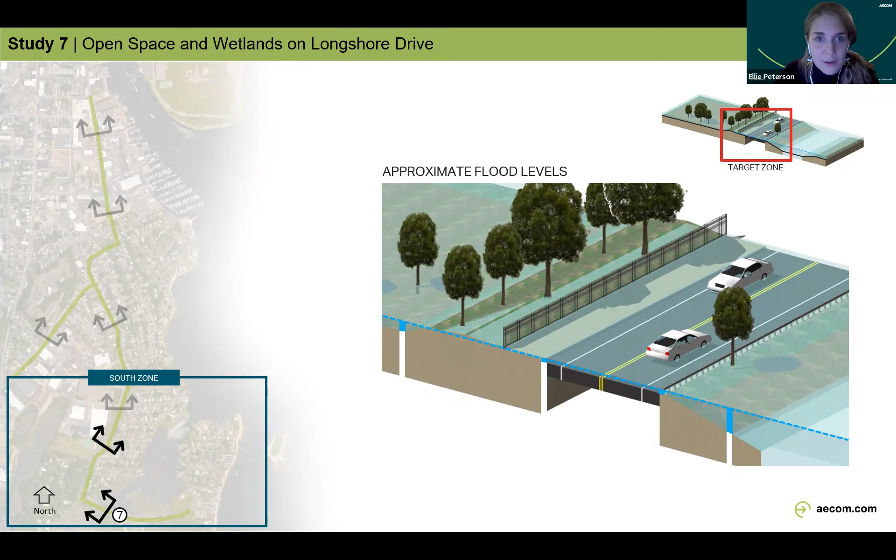This is a very important evacuation route for Harborview. So it might be an important area for us to consider as we look at all of these locations. You can move to the next slide and we'll continue the conversation.

Great, thanks for that, Ellie. I think we've got the routine down here as well, so people can raise their hands, type into the Q&A. I'm going to go to the larger map here because it's very different knowing that we're getting a little bit further removed, having the different water resources around these pieces of roadway infrastructure. It's a very different issue that we're dealing with to the south here as well.

And so do we have anyone, Michelle, that's raised their hands here? We have Lindsay. Welcome, hi Lindsay, how are you?

I joined late, so my apologies if this has already been discussed. But in a past flooding discussion I attended at City Hall a couple of years ago, there was discussion of a pumping station on Lawrence Street that is no longer operational. Has that been discussed, or is there any opportunity to reactivate or repair it? Or is it even useful at this point? Because we know it exists and it's a little frustrating to know it exists and it's not helping us.

Great, I'm looking to Michelle and Steve. I'm not sure about the status of that, or maybe Megan, if we know about any of those related facilities from the stormwater pumping. That's something we can come back to if we don't know the answer. Yeah, I'm not sure about that either, we'd probably have to look into it further and get back to you. But great for bringing it up. Thank you. No, thank you, appreciate it.

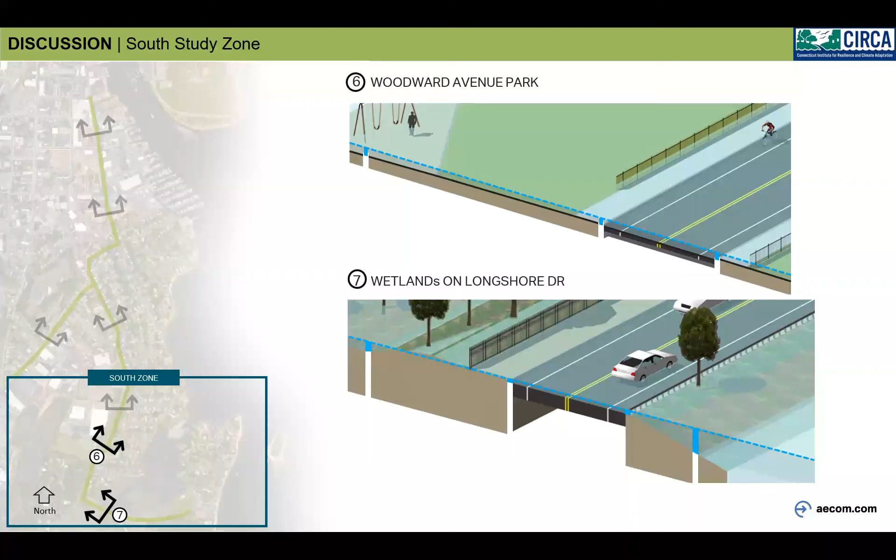Thank you, this whole evening has been great, look forward to future meetings like this. I just wanted to add that regarding the strategic raising of roads, I am assuming, but maybe I should not assume, that there needs to be a study of the off-site effects of raising roads, especially to down-gradient and side-gradient neighbors. I forgot to mention there have been not only rumors but concerns, back at the previous slide about the North Study Zone, about Water Street, but this would apply to this area as well, when and if roads are raised, especially with Soundview Landing. Yes, they took care of their own and they got a lot of federal, state, and local money to help with that. But other places that did get flooded with Sandy, and again we were lucky, but that is Concord Street, Calvary Baptist Church, very, very concerned that with the Soundview Landing drainage work, there did not seem to be a study of the side-gradient and down-gradient effects of that drainage work. We can't do piecemeal, save myself only. This is a great study now to do a holistic, whole of government approach to our problems. Thank you so much for the evening.

Great, thank you, thank you, Ben, appreciate that. Obviously the cause and effect factor, so if you're solving a solution here, does it push a problem somewhere else? Knowing that it's hard when you're pushing major pieces of water around, what are those implications? But I totally understand the question and the concern, so appreciate that.

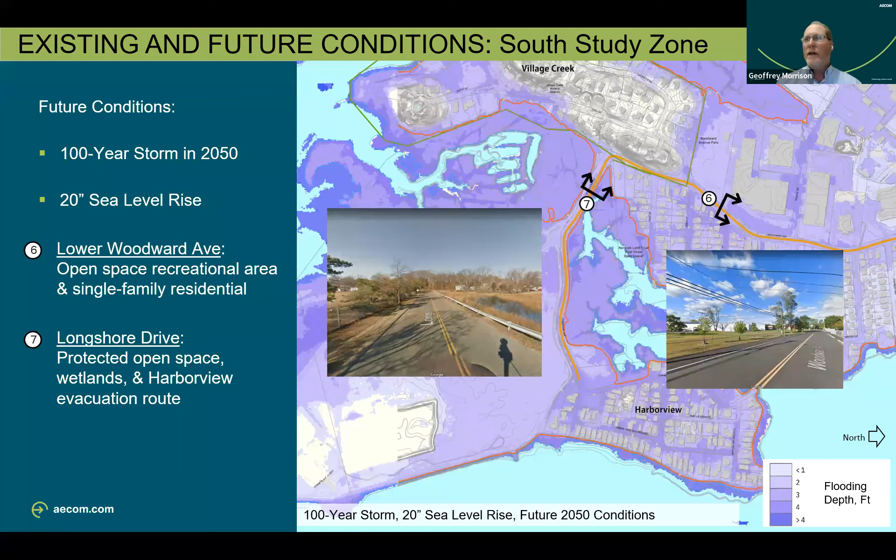So our next steps after tonight's workshop include reviewing all your comments and questions, everything we've received tonight. We can't thank you enough for that. We're going to look at all of those and start establishing priority locations and looking at mitigation efforts. Our next immediate step is to start developing conceptual designs, alternatives, and adaptation options that address not only flooding, but flooding and heat.

This is from CIRCA, and I thought this was a good thing to include as we start looking at options. This is their PERSIST decision support criteria, and I'm just going down the list: is the adaptation permittable? Is it equitable, realistic, safe, innovative, scientific, transferable, and sustainable? I think that says a lot just in that.

Next slide, please. So our project started in about October, and the final report is due in May. We're just shy of the halfway point, right? That red arrow is where we are right now. As you see in the pink, we've got stakeholder engagement throughout the whole project, but we are in the yellow zone now.

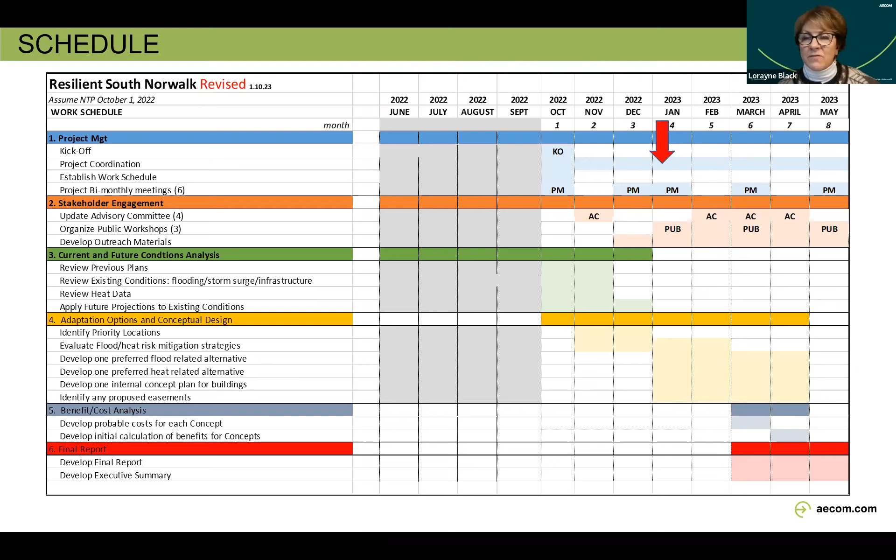We'll start to look again at priority locations, develop different alternatives, and start creating some concepts. We'll have 2 more public workshops like this or similar. One, I think, probably in March, and then again probably very early in May, but we're setting those dates now. That's where we are, and we're really looking forward to having you join us and see what we've come up with.